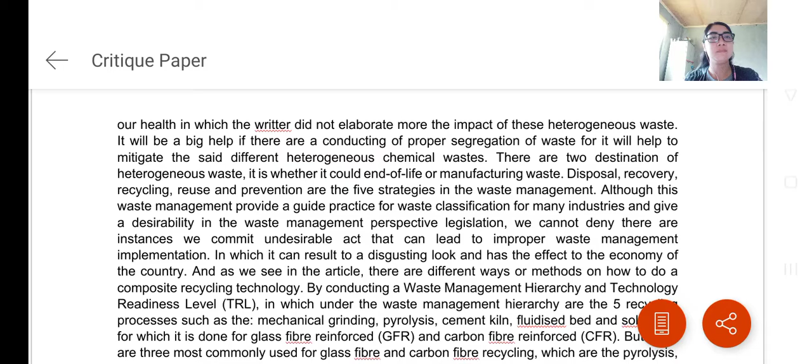This video is regarding a critical evaluation of an article. So we have here the introduction. This article was written by three authors, Justyna Rybicka, Ashutosh Tiwari from the Manufacturing and Materials Department, Cranfield University, UK, and Gary A. Leeke of School of Chemical Engineering, University of Birmingham, UK, which is entitled Technology Readiness Level Assessment of

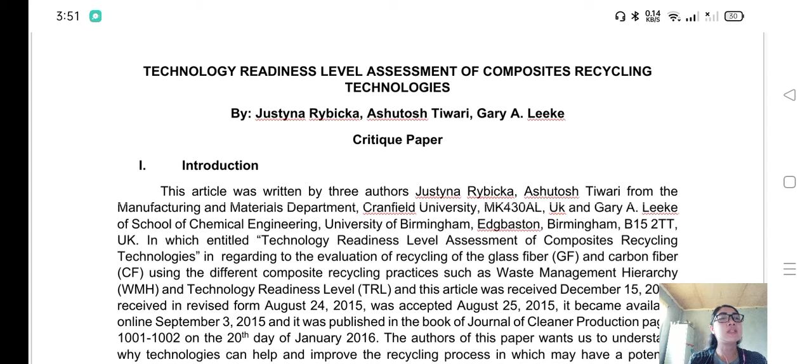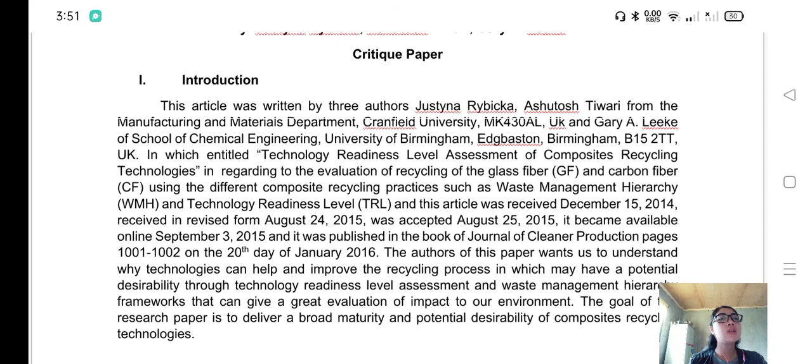Composite Recycling Technologies, regarding the evaluation of recycling of glass fiber and carbon fiber using different composite recycling practices such as waste management hierarchy and technology readiness level. This article was received December 15, 2014, received in revised form August 24, 2015, and was accepted August 25, 2015. It became available online September 3, 2015, and it was published in the Journal of Cleaner Production, pages 1001 to 1002, on the 20th day of January 2016.

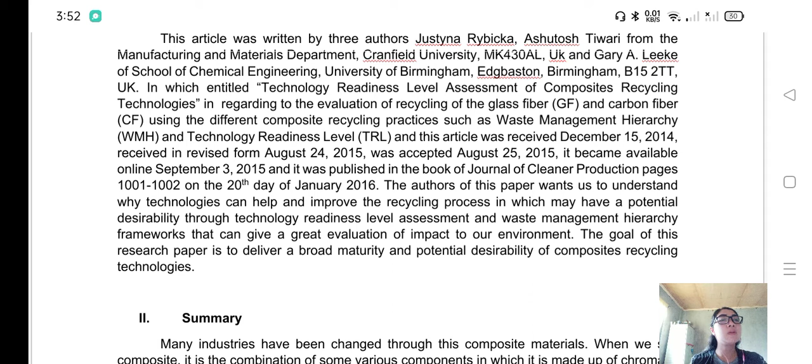The author of this paper wants us to understand why technologies can help and improve the recycling process, which may have a potential desirability through a technology readiness level assessment and waste management hierarchy frameworks that can give a great evaluation of impact to our environment. The goal of this research paper is to deliver a broad maturity and potential desirability of composite recycling technologies.

Next, we go to the summary of this article. Many industries have changed through these composite materials. When we say composite, it is the combination of various components, made up of chromatic parts of elements. In this article, the composite materials comprise glass and carbon fiber, for which the global demand increases rapidly.

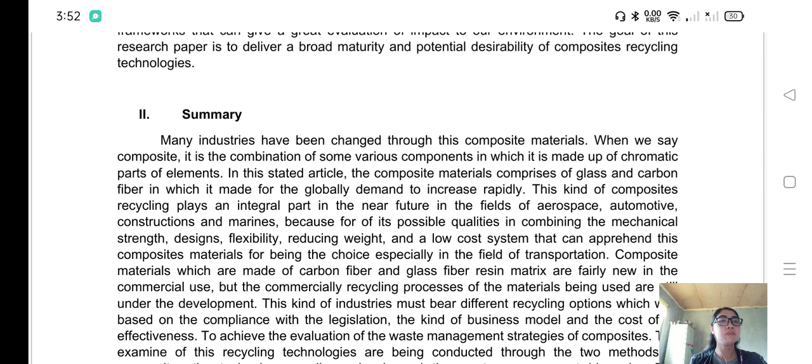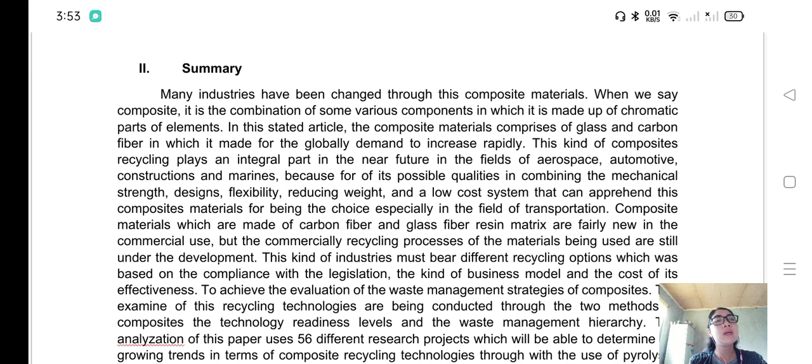This kind of composites recycling plays an integral part in the near future in the fields of aerospace, automotive, construction, and marine because of its possible qualities in combining mechanical strength, design flexibility, reducing weight, and a low-cost system that can make these composite materials the choice, especially in the field of transportation.

Composite materials, which are made of carbon fiber and glass fiber resin matrix, are fairly new in commercial use, but the commercial recycling process of the materials being used is still under development. This kind of industry must bear different recycling options, based on compliance with legislation, the kind of business model, and cost effectiveness.

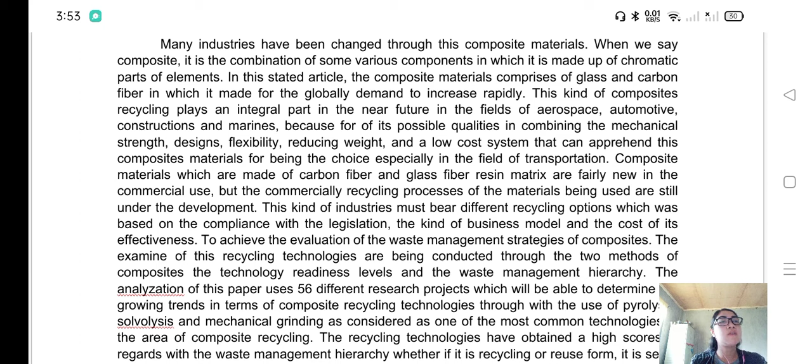To achieve the evaluation of the waste management strategies of composites, the examination of these recycling technologies is conducted through two methods, the technology readiness level and the waste management hierarchy. The analysis of this paper uses 56 different research projects to determine the growing trends in composite recycling technologies, with pyrolysis, solvolysis, and mechanical grinding considered the most common technologies in the area of composite recycling.

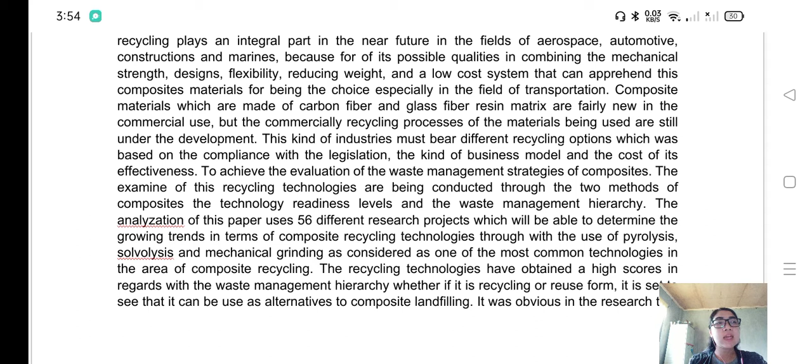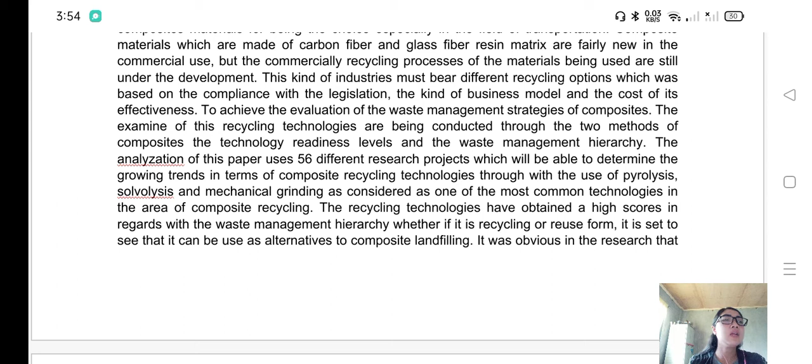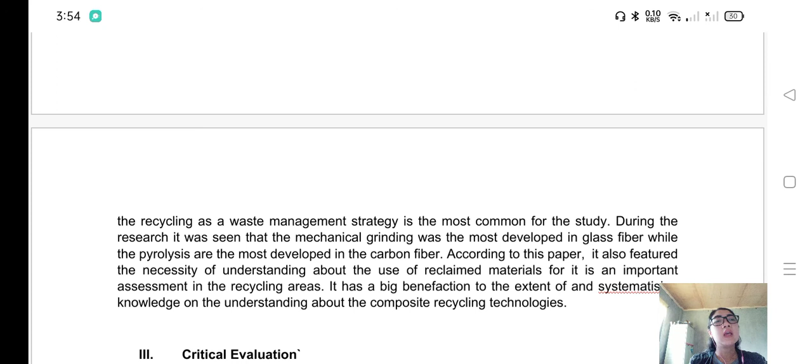The recycling technologies have obtained high scores with regard to the waste management hierarchy, whether in recycling or reuse form. It is set to see that they can be used as alternatives to composite landfilling. It was obvious in the research that recycling as a waste management strategy is the most common for the study. During the research, it was seen that mechanical grinding was the most developed in glass fiber while pyrolysis is the most developed in carbon fiber.

According to this paper, it also featured the necessity of understanding the use of reclaimed materials, for it is an important assessment in the recycling areas. It has a big benefaction to the extent of systematizing knowledge on the understanding of composite recycling technologies.

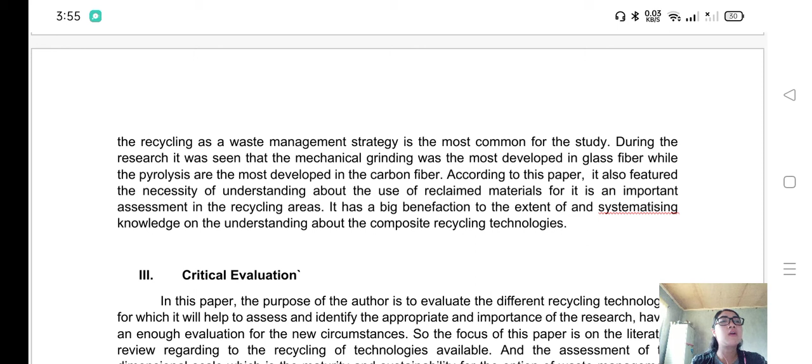So we have here the critical evaluation of the article. In this paper, the purpose of the author is to evaluate the different recycling technologies, which will help to assess and identify the appropriateness and importance of the research, having enough evaluation for the new circumstances. So the focus of this paper is on the literature review regarding the recycling technologies available, and the assessment of a two-dimensional scale, which is the maturity and sustainability for the option of waste management.

This kind of assessment could bring significant cost and complicated operations in the future waste management of composites for some industries. The glass and carbon fiber are the new matrix in commercial use, contributing to a viable result, but still the availability of the process of this material is under development. Some manufacturers in Europe are paying the cost of landfill tax for disposing their waste to the landfill site, which includes a climate change levy.

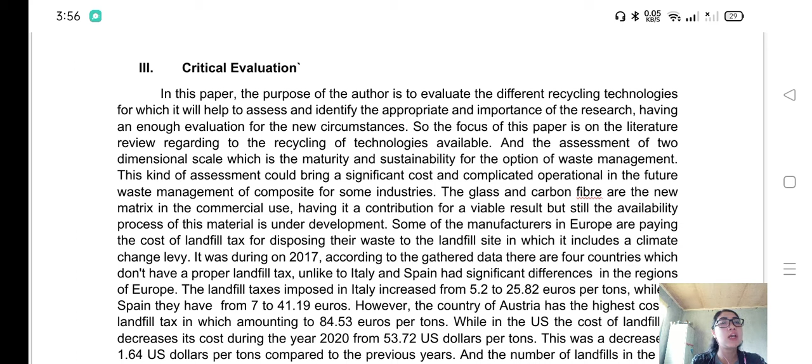In 2017, according to the gathered data, there are 4 countries which don't have a proper landfill tax, unlike Italy and Spain, which had significant differences in the regions of Europe. The landfill taxes imposed in Italy increased from 5.2 to 25.82 euros per ton, while in Spain, they went from 7 to 41.19 euros. However, Austria has the highest cost of landfill tax, amounting to

84.53 euros per ton, while in the US, the cost of landfilling decreased during the year 2020 from 53.72 US dollars per ton. This was a decrease of 1.64 US dollars per ton compared to previous years, and the number of landfills in the US has decreased within the last few decades. But even though some countries like the US have decreased their landfill tax value, there are some countries where landfilling is still highly costly or expensive, and it has become the least preferred option by legislation and is recognized as unviable for some industries.

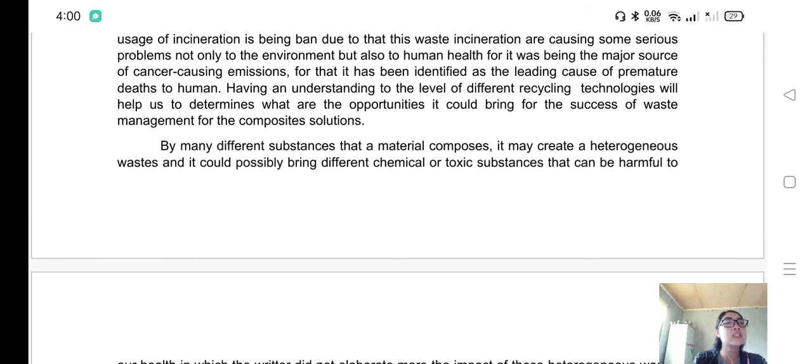Having an understanding of the level of different recycling technologies will help us determine the opportunities it could bring for the success of waste management for composite solutions. With the many different substances that a material is composed of, it may create heterogeneous waste, and it could possibly bring different chemical or toxic substances that can be harmful to our health, in which the writer did not elaborate more on the impact of this heterogeneous waste.

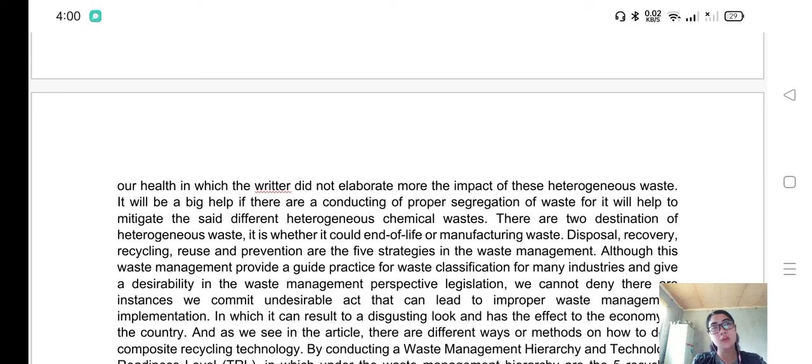It will be a big help if there is proper segregation of waste, for it will help to mitigate the said different heterogeneous chemical waste. There are two destinations of heterogeneous waste: it could be end of life or manufacturing waste. Disposal, recovery, recycling, reuse, and prevention are the 5 strategies in waste management.

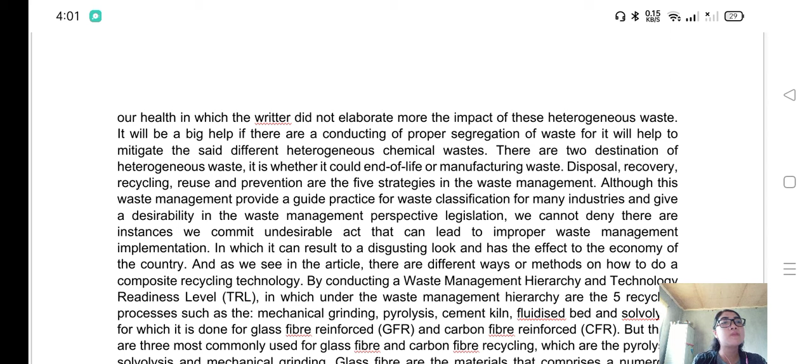Although waste management provides a guide practice for waste classification for many industries and gives desirability in the waste management perspective legislation, we cannot deny that there are instances we commit undesirable acts that can lead to improper waste management implementation, which can result in a disgusting look and has an effect on the economy of the country.

And as we see in the article, there are different ways or methods of composite recycling technology by conducting a waste management hierarchy and technology readiness level, in which under the waste management hierarchy are the 5 recycling processes such as mechanical grinding, pyrolysis, cement kiln, fluidized bed, and solvolysis, which are done for glass fiber reinforced and carbon fiber reinforced composites.

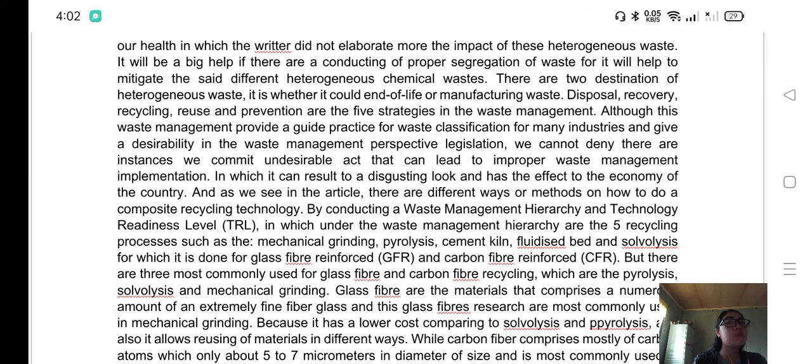But there are 3 most commonly used for glass fiber and carbon fiber recycling, which are pyrolysis, solvolysis, and mechanical grinding. Glass fibers are materials that comprise numerous extremely fine fiberglass strands, and glass fiber research most commonly uses mechanical grinding because it has a lower cost compared to solvolysis and pyrolysis, and it also allows reusing materials in different ways.

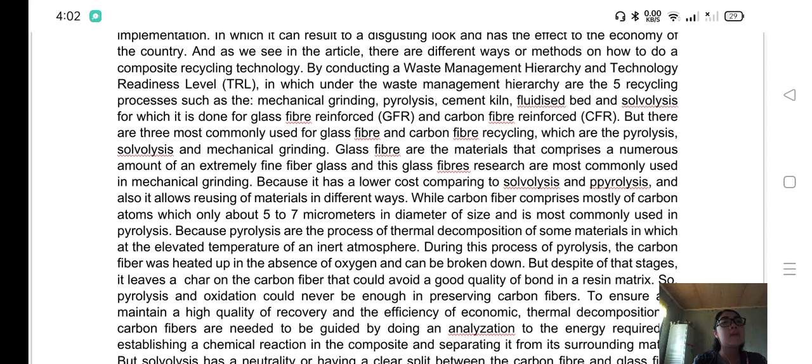While carbon fiber comprises mostly carbon atoms, only about 5 to 7 micrometers in diameter, and is most commonly used in pyrolysis. Pyrolysis is the process of thermal decomposition of materials at an elevated temperature in an inert atmosphere. During pyrolysis, the carbon fiber is heated in the absence of oxygen and can be broken down. But despite these stages, it leaves a char on the carbon fiber that could prevent a good quality bond in the resin matrix.

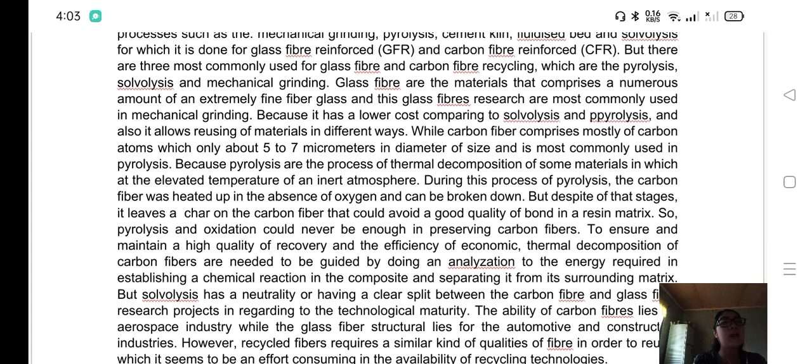So, pyrolysis and oxidation could never be enough in preserving carbon fibers. To ensure and maintain high quality of recovery and the economic efficiency of thermal decomposition, carbon fibers need to be guided by an analysis of the energy required to establish a chemical reaction in the composite and separate it from its surrounding matrix. But solvolysis has a neutral or clear split between carbon fiber and glass fiber research projects regarding technological maturity.

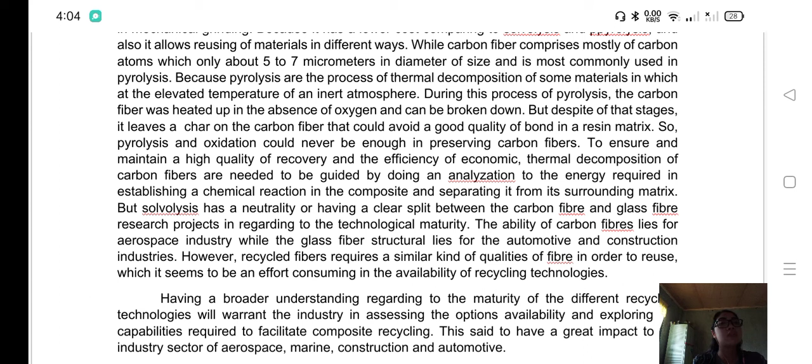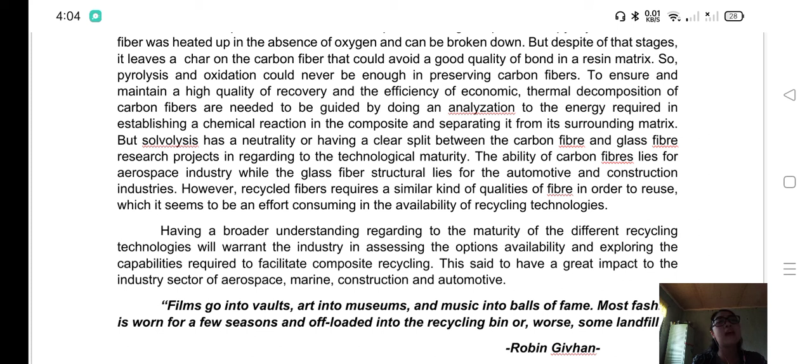So the ability of carbon fiber lies in the aerospace industry, while glass fiber structures lie in the automotive and construction industries. However, recycled fiber requires similar qualities of fiber in order to be reused, which seems to be effort-consuming given the availability of recycling technologies. Having a broader understanding of the maturity of different recycling technologies will help the industry assess the available options and explore the capabilities required to facilitate composite recycling. This is said to have a great impact on the aerospace, marine, construction, and automotive sectors.

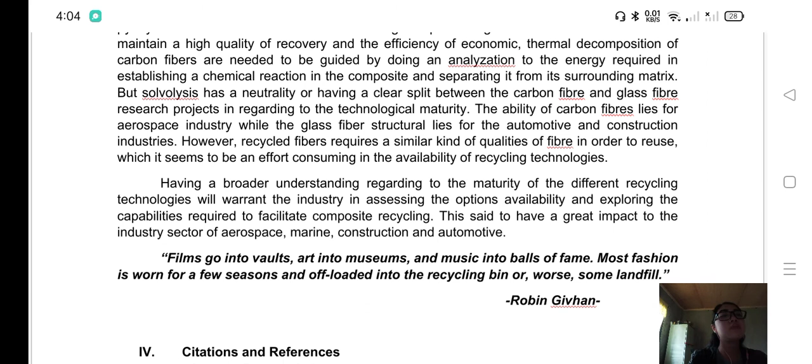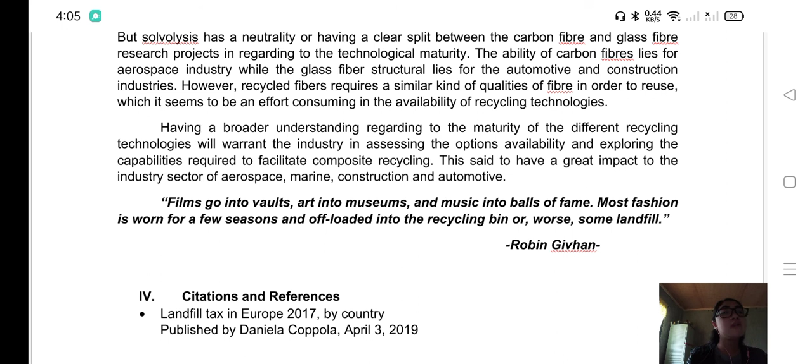So, I will close this article with a quotation from Robin Givhan stating that films go into vaults, art into museums, and music into halls of fame, but most fashion is worn for a few seasons and offloaded into the recycling bin or, worse, some landfill. And under that, we have the different citations which I gathered from the internet or other sources.